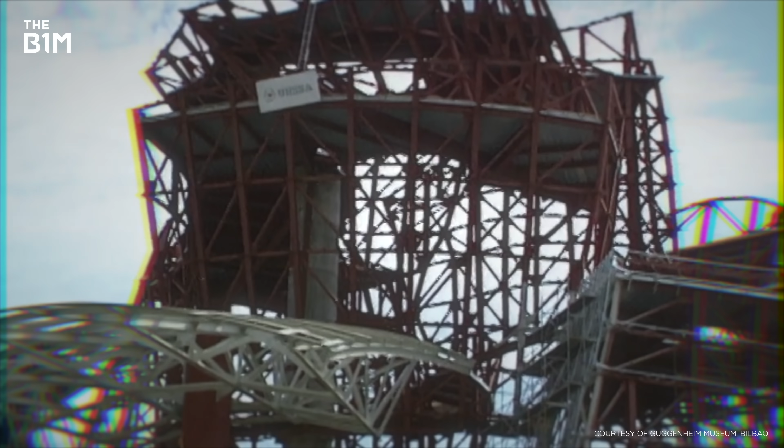People said this building couldn't be built. There were also those who said it shouldn't be built. There was a lot of skepticism that in a destitute city, devastated by the loss of industry, this was a huge gamble its citizens could kind of do without. This project was going to be a success for everybody or a failure for everybody.

Philip Johnson calls it, quote, the greatest building of our generation. But in one last throw of the dice, this building defied all the odds and in doing so, changed the world. It immediately was hailed a masterpiece when it opened in 1997.

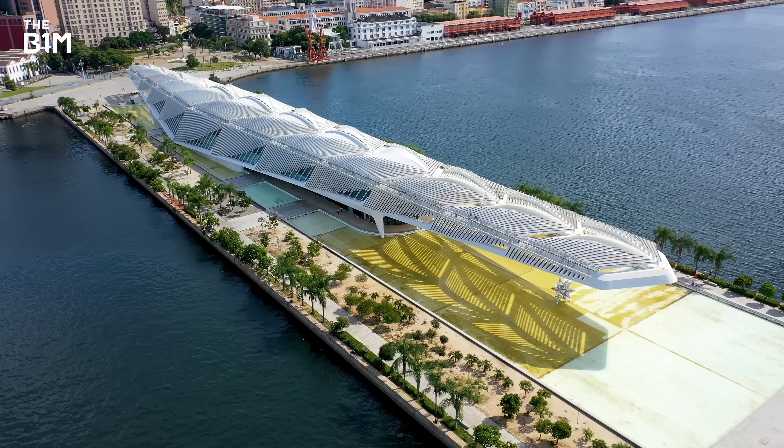Today, we're used to seeing buildings that defy the laws of physics, but back in the early 90s, when work first began on the Guggenheim Bilbao, there was nothing on Earth that looked anything like this. Considered by many to be a masterpiece. We got to maybe push things further than have ever been done going forward.

It was built using software developed to design fighter jets. It kick-started the use of 3D tech, leading to a revolution in construction. It made a global superstar its architect and transformed its host city from a downtrodden backwater into a thriving global destination. And if all that weren't enough, it was so successful it went on to become a template for urban regeneration that is still in use today.

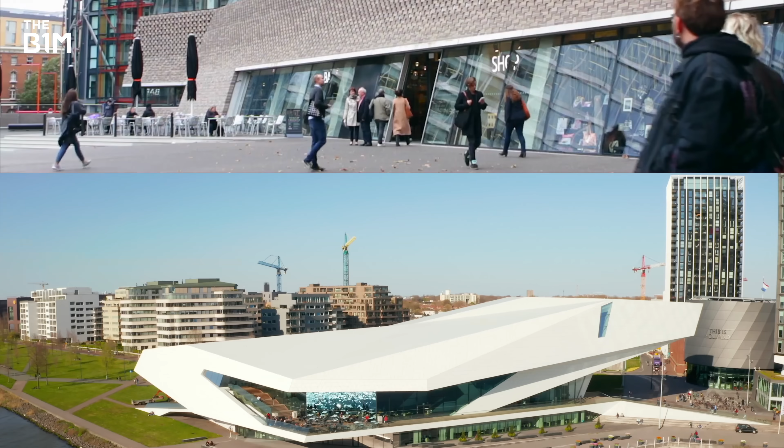In fact, you're probably living near somewhere that was inspired by this structure. How it was built is a story that involves Russian submarines, rock climbers, and a giant fish. But most remarkable of all is the fact that despite its outrageous design, it was completed on time and on budget.

Our story begins back in 1991 in northern Spain. Forget the sun, sea and sand of the south, this is the Basque Country, Spain's historic industrial heartland. It was an area of mines, factories and more than its fair share of rain. Its largest city, Bilbao, had been a prosperous hub of heavy industry, with steelworks and shipyards lining the Nervión River that ran through it. But as the world changed, its industries couldn't keep up with overseas competitors, and in the 1970s, it fell into long-term decline.

As industry collapsed, the city was gutted. Between 1979 and 1985, a quarter of all industrial jobs were lost. And 1991 is a moment where, just to give you an idea, it was just 3 years after a fairly important shipyard, which was located very right in the middle of the city, had closed.

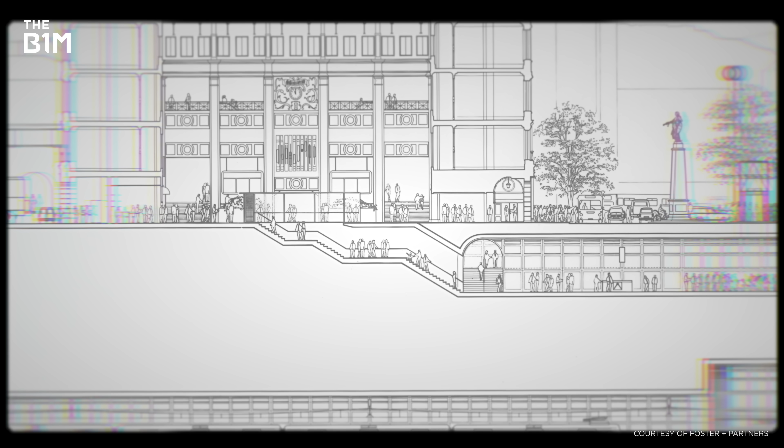Horrible. The plan was ambitious, blending practical infrastructure with landmark projects, all driven by major international architects. Foster & Partners was commissioned to design the city's first metro, while Santiago Calatrava was brought in to create a new pedestrian bridge and a modern international airport.

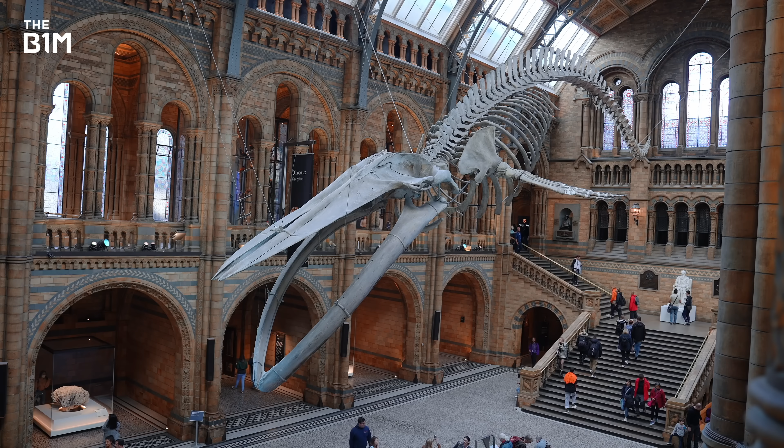But the centrepiece would have to be something truly extraordinary. A museum big enough and bold enough to stand alongside the world's greatest cultural institutions. To do this, the Basque government partnered with New York's Guggenheim Foundation. The government agreed to put up $100 million to pay for the building, as well as a one-off payment to the Guggenheim to license its name and allow access to the foundation's collection.

But with such a huge amount of taxpayers' money being spent on a speculative project when unemployment was sitting around 20%, the public reaction wasn't great. The project itself was very controversial from the beginning. There was a lot of resistance to the idea of the public institutions spending money in a cultural institution instead of the more kind of basic needs of the time.

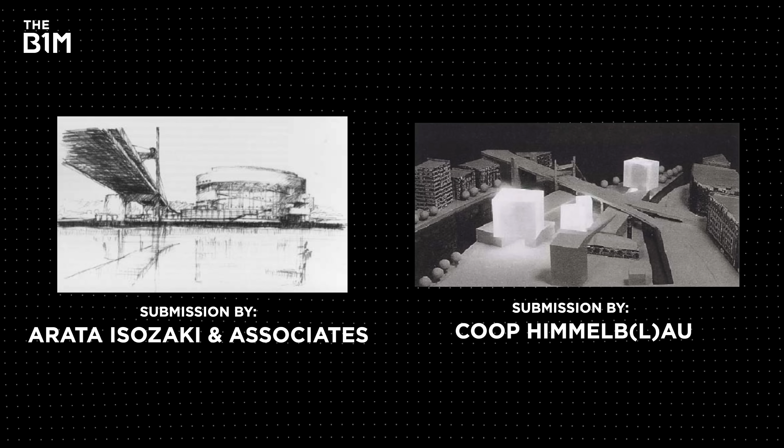A competition was held to choose a design for the museum, with participants given just 2 months to develop a proposal. To avoid any further controversy, 2 very clear stipulations were made right from the outset. Under absolutely no circumstances could this project be late or go over budget. And with those 2 things in mind, this is the design they chose.

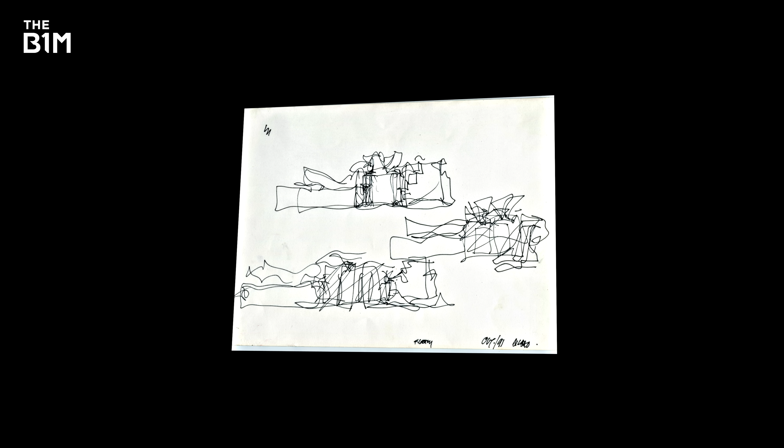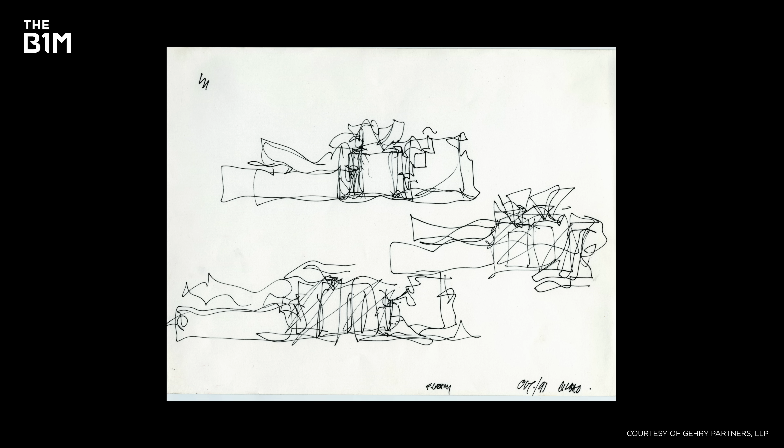The panel decided on Frank's design, which, although it was probably the one that made everybody more nervous about how you can build that, it was fairly clear that it was the one who had understood and reflected better the different goals for the building.

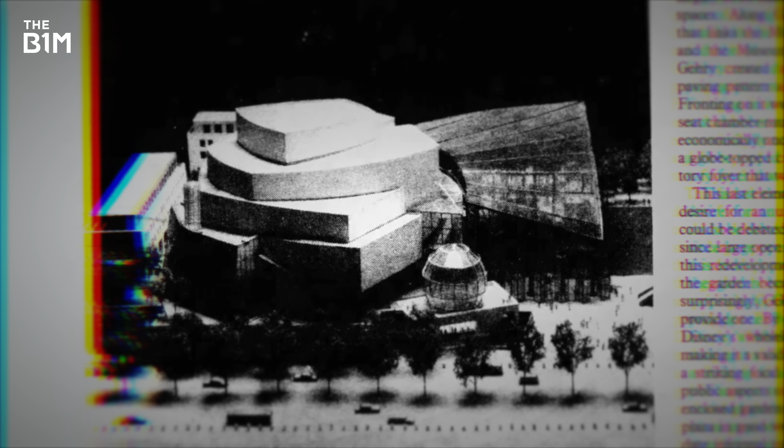The panel had reason to be nervous. Frank Gehry had built a reputation for innovative, eye-catching designs, but his latest venture, the Walt Disney Concert Hall, was making headlines for all the wrong reasons. Commissioned in 1987, by 1991 the project was entering a long hiatus as engineers struggled to work out how to build it, and funding and planning issues stopped any significant progress.

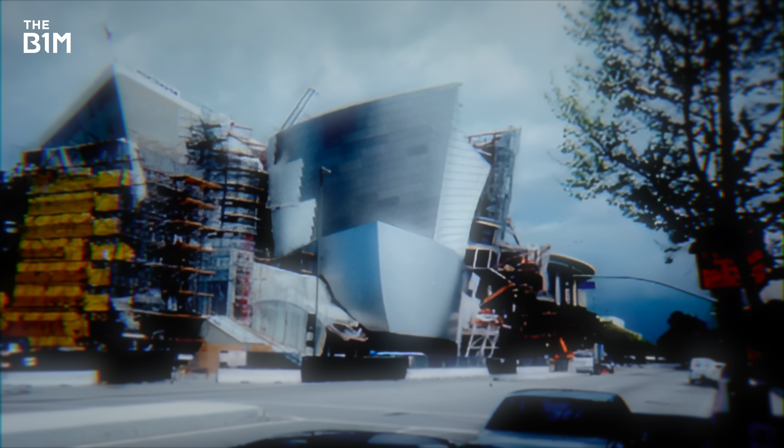With an even more audacious design for the Guggenheim Bilbao, serious questions were being asked about whether it was even possible. There was a lot of skepticism, and a lot of criticism also even from the architectural world, saying, well, this building cannot be built, or cannot be built on time, cannot be built on budget.

But this project would be different. To pull off his most daring design yet, Gehry had an ace up his sleeve. But before he could use it, his team first had to transform his early sketches into something more tangible, starting with his trademark process of model building.

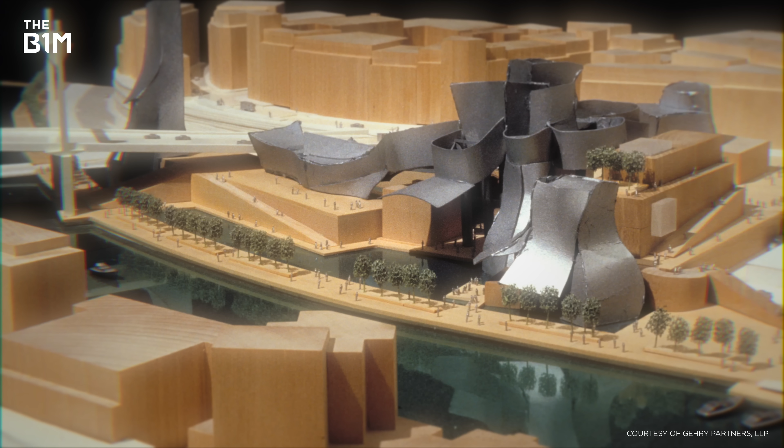Using those initial sketches as a foundation, Gehry's design team began experimenting with models made from paper and card, developing the building's distinctive form through physical manipulation. There are initial conceptual sketches, descriptive gestures of what the building is trying to capture, then physical models that are initially just like small, almost like children's building blocks.

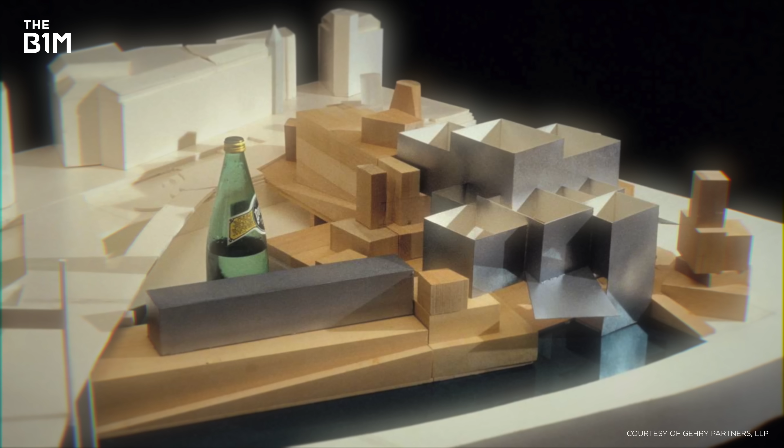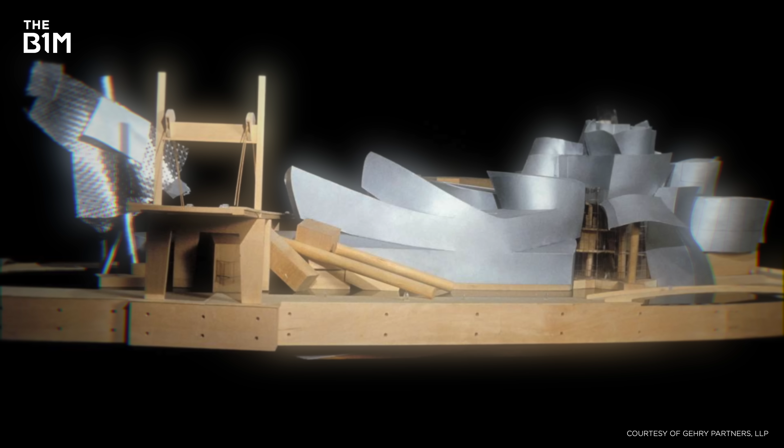From these, the team would develop hundreds of models, increasing in complexity as they balanced creative flair with the practical requirements of the building. You were working with the form both from an expressive gesture, but then also dealing with some of the work that was happening with the consultants and what their requirements were, how you were meeting floor area requirements, or did you have enough room for the bathrooms that were needed in that area?

Now, designing something this complicated with pieces of card is one thing, but building it is a heck of a lot more difficult. And to explain why, I'm going to need some crisps.

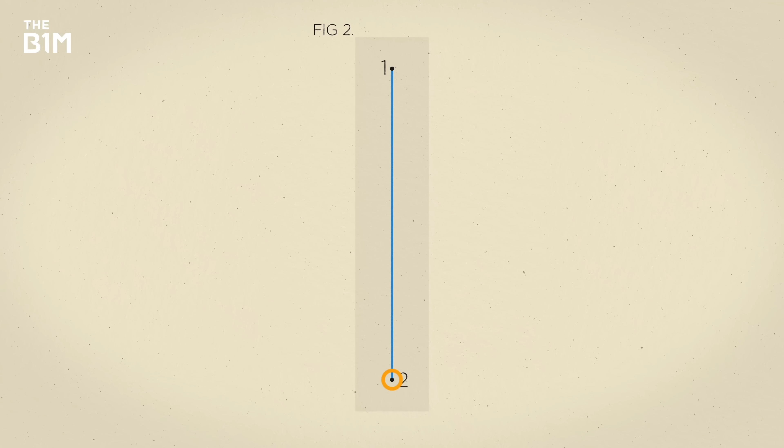For thousands of years, architecture and engineering has run on a set of rules. Buildings were based around flat shapes or planes like squares, rectangles, and triangles. Within those, certain things will always be true: two parallel lines will never meet, a straight line can always be drawn between two points, and right angles are always 90 degrees. That's known as Euclidean geometry, named after a guy called Euclid who first wrote about it. It's a big one.

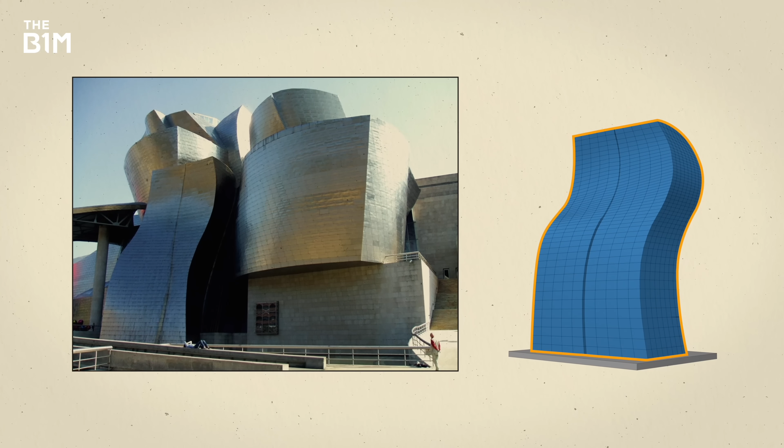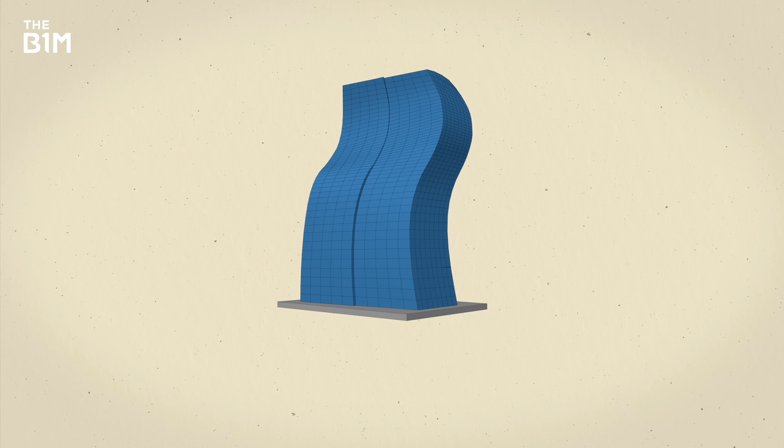You can see this in everything, from the pyramids to skyscrapers like the Empire State Building. But the Guggenheim Bilbao isn't based on flat surfaces. Just take a look at this wall here. Look how it curves out, then back in on itself, then twists around the higher it goes. If we draw a line from here to here, rather than being straight, it ends up looking like this. And if we drew a triangle on it, the angles wouldn't add up to 180 degrees. Shapes like this fall into a category known as non-Euclidean geometry.

So Euclidean, non-Euclidean, why does any of that matter? Well, this right here is a crisp, or to our American viewers, a chip. Now, this is actually a really good example of Euclidean geometry because it's round, flat, square, no surprises. If you were an engineer and I asked you to build this for me, it would be pretty straightforward.

I could draw it from this angle and from this angle, and you'd have a pretty good idea about what I was after. Now imagine I've asked you to build me a Pringle, which would be a pretty strange request. I could show you it like this, and it would look flat, but turn it this way and you realise it's curved not just in one direction, but in two. I can't accurately draw this in two dimensions because it doesn't follow any of the rules that allow me to do that. I could give you the gist of it, but that's not really good enough.

Engineers need precise measurements to be able to carry out their work. To really show you how to build this, I would need an advanced piece of software. Enter CATIA.

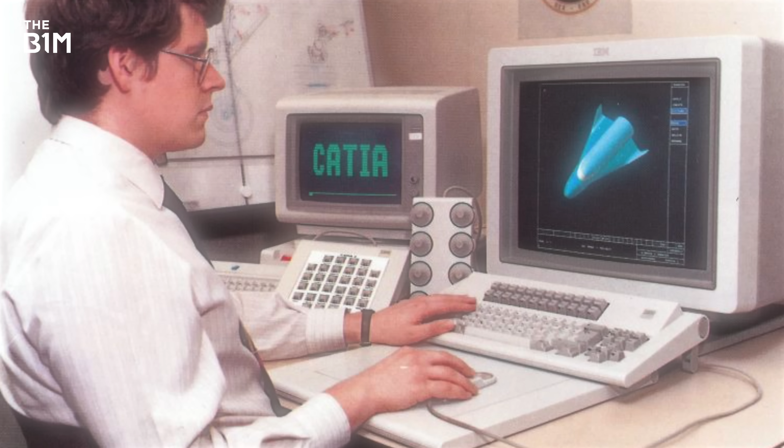CATIA is a 3D modelling software first developed to help design the French Mirage. But in the early 1990s, it was making a name for itself in the design of the new Boeing 777, touted as the world's first paperless aeroplane.

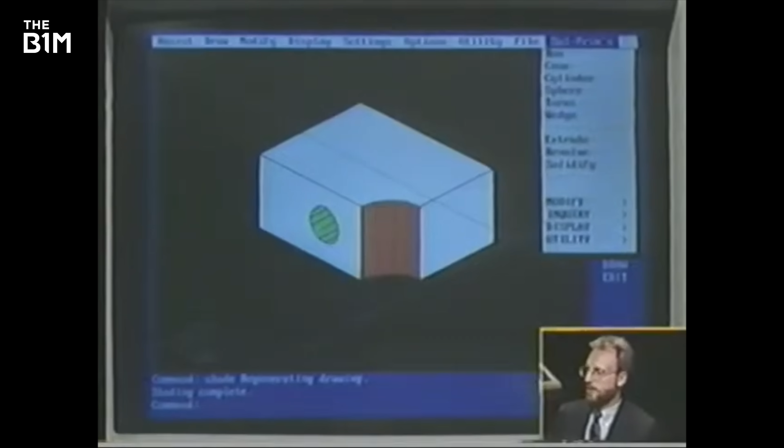Computer design packages were beginning to make inroads into architects' studios, but what CATIA offered was revolutionary. Because it was based on mathematical equations rather than polygons, it allowed the team to model complex 3D shapes and from that model provide accurate cross-sections and plans to engineers.

So at the time, the prevalent way of working was CAD, AutoCAD, Graphisoft. You could do limited stuff in 3D, but it was predominantly a replacement for 2D pin bar manual drafting, right?

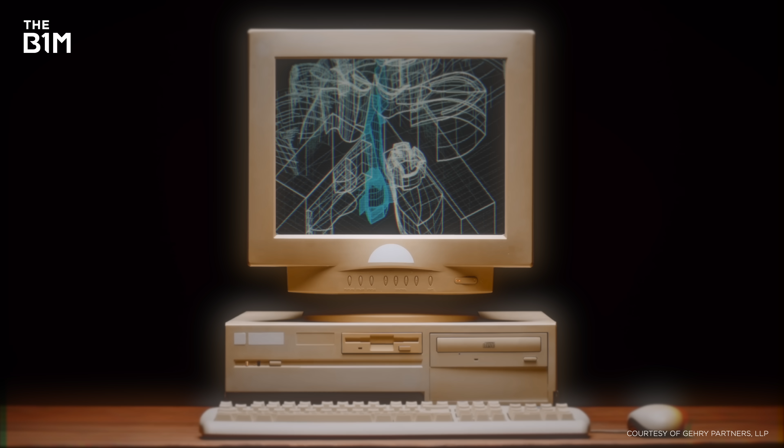The complex geometries being developed by Gehry's design team were still novel in the world of architecture, but this was all basic stuff for aerospace software which could not only model the complex geometries, but also split them up into components which had precise details about them.

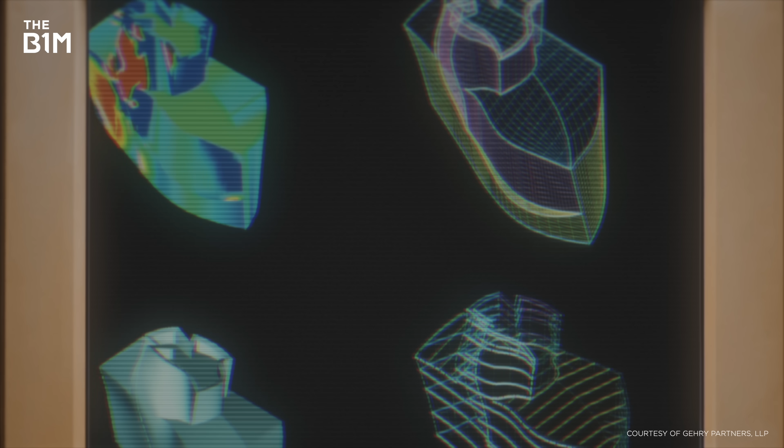The idea that there was maybe an overall shape to the airplane or car, and then pieces would be fit into that, and then those pieces would be distributed from manufacturing. The whole thing would come together virtually. You would test the plane, and then you'd build it, and it would work, right?

But the first time Gehry used the software, it was to design something more used to swimming than flying. Well, yes, that was pretty innovative at the time, and we already had some early successes using the CATIA technology through our Barcelona project, which was built in 1992.

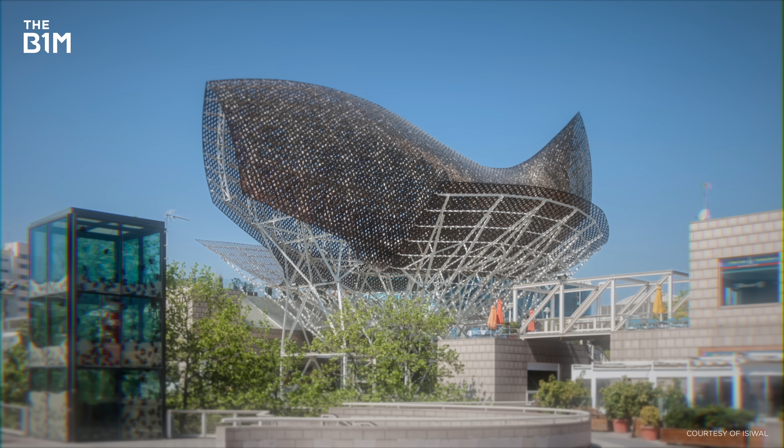Gehry had been commissioned to design a sculpture for the 1992 Barcelona Olympics. What he designed was this: El Peix, or fish. Now, granted, it doesn't look super complicated, but just like the Pringle, it's based on a series of huge curves that are almost impossible to describe on paper.

So for a solution, his team turned to CATIA. We were doing it through traditional drawings and it just wasn't working out, and we found some support outside the office that had aerospace and aeronautic background.

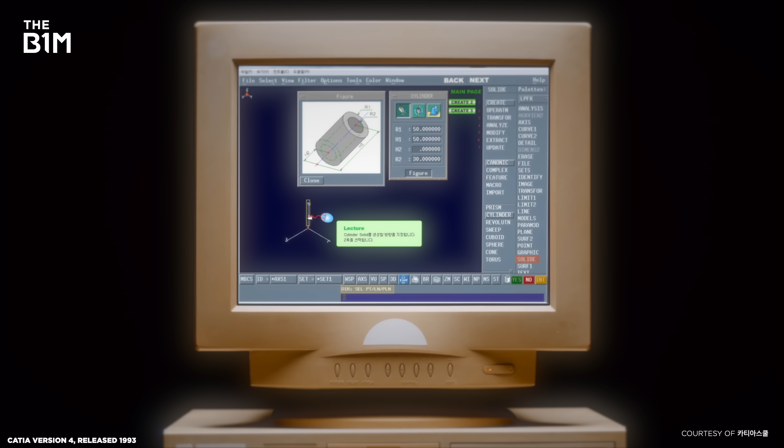This strange new software had proved its worth and was seen as the key to unlocking the daring design of the Guggenheim. Now, for any Gen Zs out there thinking, well, so what? It's worth remembering just how basic digital tech was back then.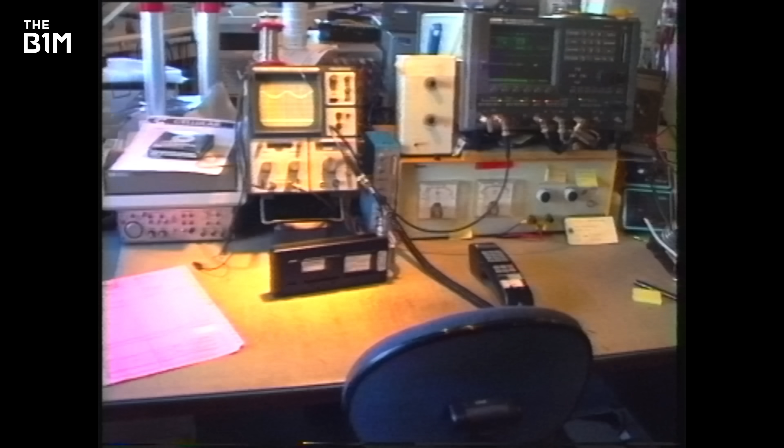At this point in the early 90s, most people had never used the internet, mini-discs were the latest way to listen to music, and cutting-edge computer game graphics looked like this.

And this sounds crazy, but the ability to do real-time rotation of shaded models, you really didn't see it anywhere before. I mean, you would work in wireframe, and then there would be this process where you'd render and you'd see over the course of a half hour that image taking place, you know.

And just to see somebody being able to look at a complex shape from all its sides and understand it was, you know, it's not just about the real time, it's interactive, right? So the interaction with real-time geometry for me was revolutionary.

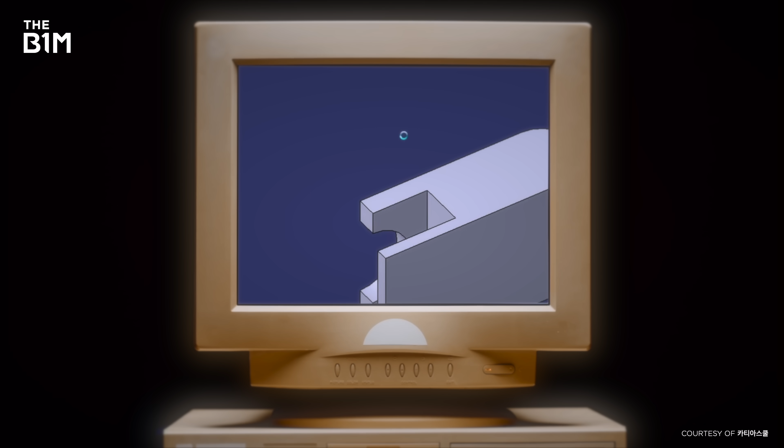Now, as groundbreaking as this technology was in the 90s, don't think the innovation stopped there, because CATIA has come a very long way since the days of Guggenheim.

Take a look at this, for example. It's called the Henderson in Hong Kong, and as you can see, it's absolutely epic. It was also built using CATIA on the 3D Experience platform and really pushed the limits of design and fabrication.

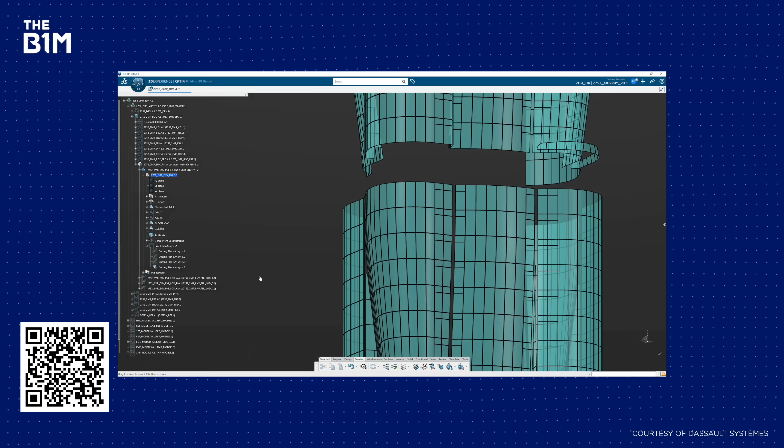The entire skyscraper is covered in more than 4,000 individually shaped panels. 3D Experience models each one and even simulates how they'll be manufactured.

Now, when I was first starting out in the industry, I honestly would have thought that something like this would have been impossible because everything is so complex and interconnected. You change one thing and everything else gets affected and has to change with it.

But 3D Experience is a real game changer because it updates everything. You make a change to the facade and it updates not just that, but also the structural layout, the internal floor plates, all of it in real time.

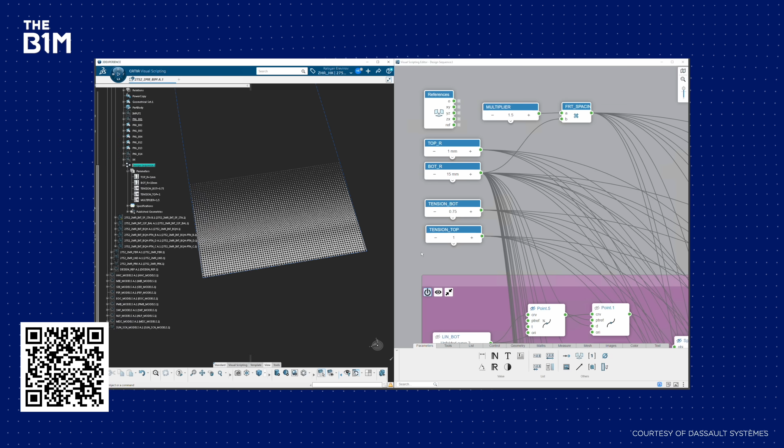And perhaps most importantly, every piece of information is managed on the same platform. Trust me, on a project this big and this complicated, with so many people involved, miscommunication happens a lot. So having one model, one common source of truth that architects, engineers, manufacturers can all refer to is a real lifesaver.

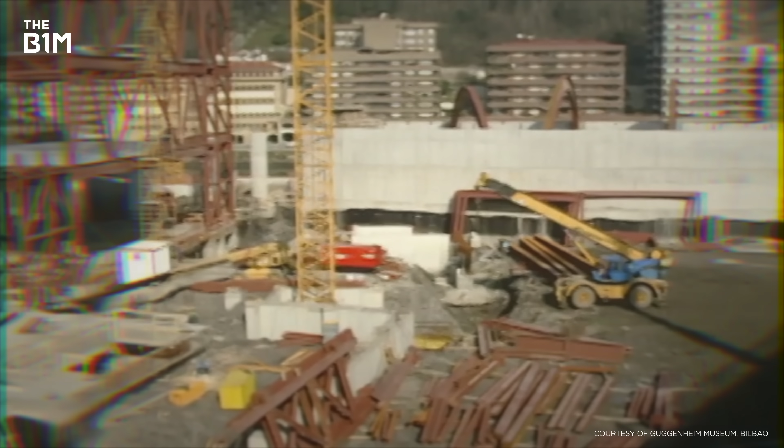In 1993, just 2 years after winning the competition, construction began. And this is where things got really tricky. CATIA played a critical role, but it didn't have all the answers. It was able to accurately describe what had to be built, but then it was over to the engineers to work out how to actually construct it.

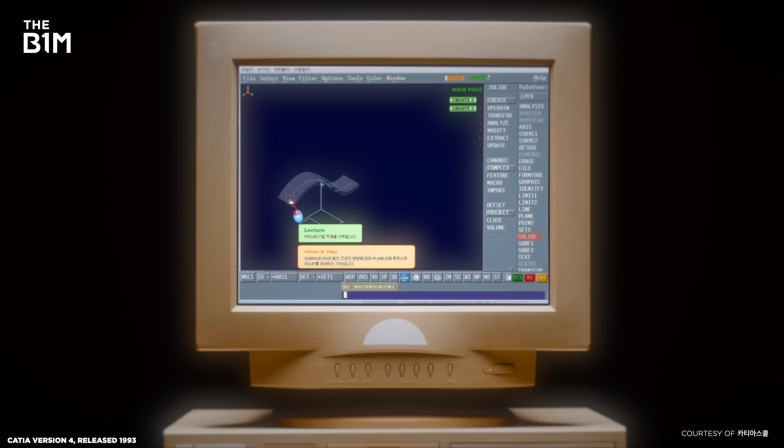What is CATIA for us? A group of surfaces and volumes. And this is perfectly designed, but nothing at all defined in one sentence. Not ready to build. While CATIA was great at defining the overall shape of the museum, a lot of work still had to go into how it would be manufactured.

You have a cut, you have a line that perfectly designed the shape of different areas. That shape is titanium, is stone, gypsum board, is glass. But in order to place these materials on the structure, you have to develop the engineering, and you have to manufacture this structure - these tubes or steel profiles in arcs of circumferences - in order to construct this, and then to put the surface, the cladding, on the titanium and gypsum or stone or whatever.

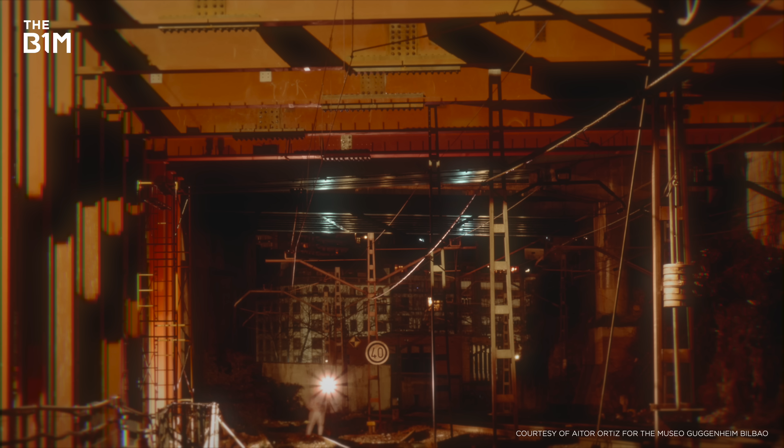The job of developing the structural design went to SOM in Chicago, who took Gehry's plans and developed an intricate steel mesh that would provide a strong frame that could accommodate the building's expressive curves, but crucially also create a large, open interior free of columns.

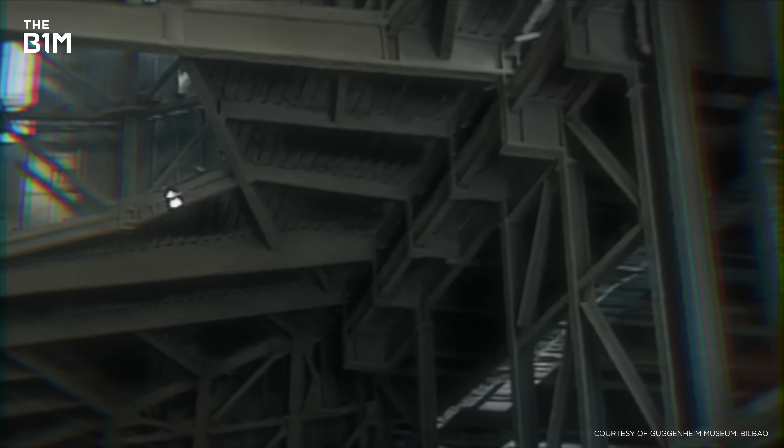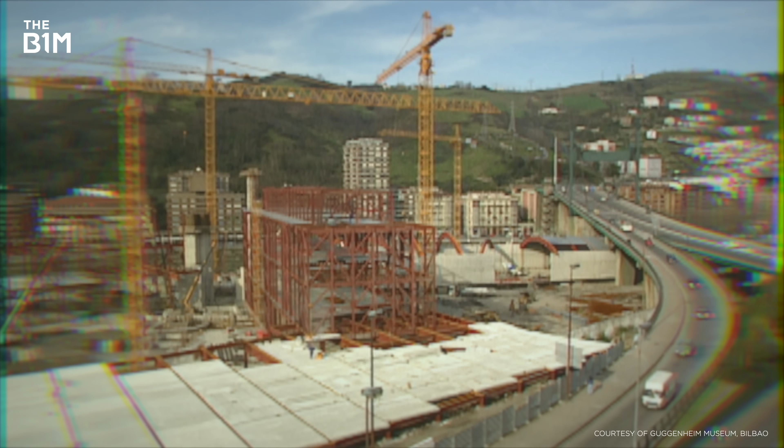The primary structure was so complex and interlinked that large parts were unable to freestand and were held in place by cranes until it was complete. The design was so intricate that no two steel beams in the entire 3,000-ton structure were the same. But also, none of them were curved.

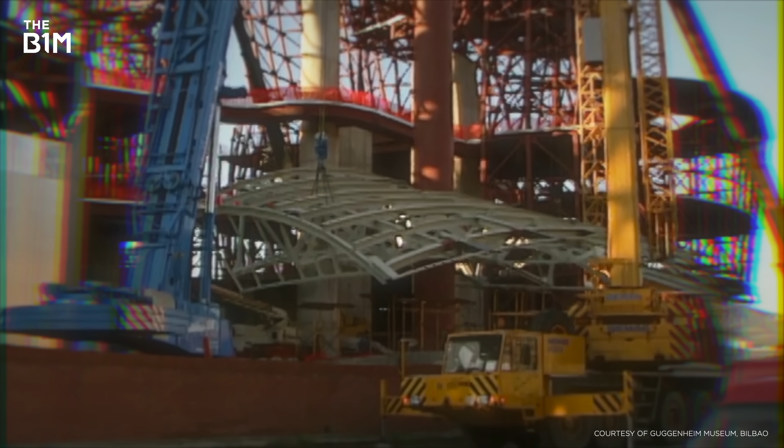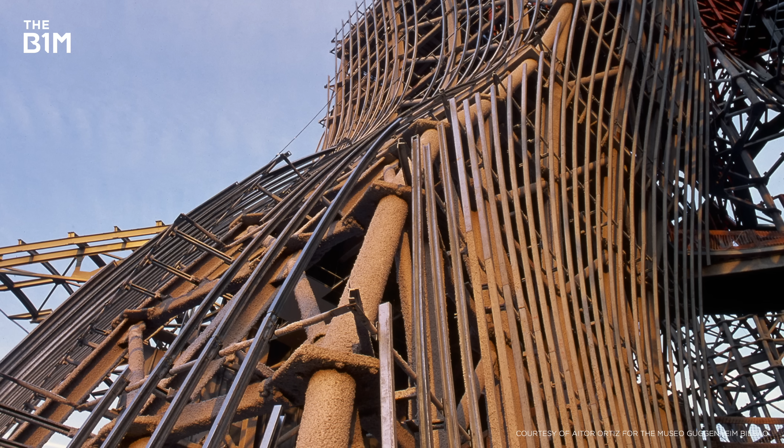To achieve the facade effect of a single or sometimes double curve, more steel structures were built on top. A secondary frame of curved horizontal beams provided shape along one axis, and a third, tertiary structure composed of curved vertical beams provided the definition for the other.

Here is the wall we looked at earlier. Look at how the different structures create arcs and curves that a curved surface can be placed on. They are arcs of circumferences in general, depending on the area or the zone. They could be straight as well, but in general, because of the shape of the museum, there are almost no straight lines - they are all curves in one direction or in two directions, depending on the area.

But all the profiles, the beams of the primary structure, were straight. The massive structure was straight, but the secondary and tertiary were curves, arcs of circumferences.

Once the structure was complete, work moved on to enclose it. Stainless steel panels were installed to enclose the structure, followed by a waterproof membrane.

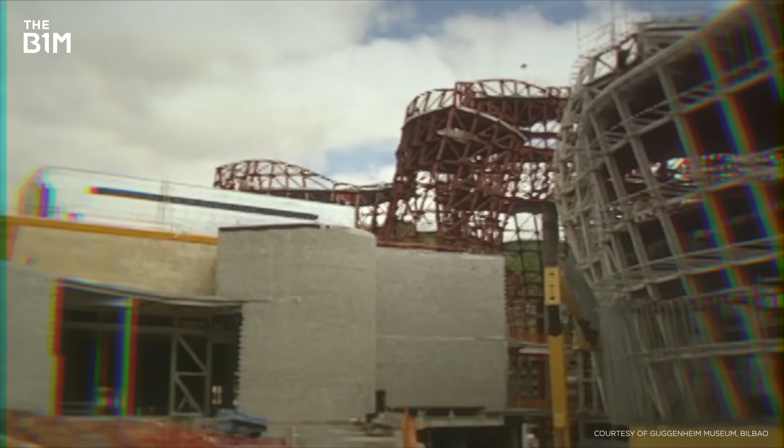The Guggenheim Bilbao isn't just about wavy curves. What really strikes you is the warmth with which it reflects the light in a soft, pillowy texture. Bilbao is a city that's often cloudy, and yet the museum still reflects this with its unique sense of warmth and sympathy. But the story of how it took on that character is a series of chance events, beginning 3,500 kilometers away.

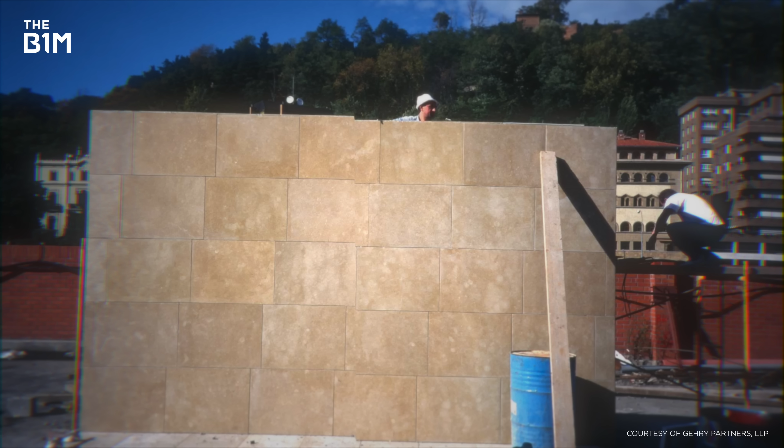The other came sometime later, on an uncharacteristically overcast day in Los Angeles. Gehry's team had been struggling to choose a material to clad the building in. He'd previously used a lead-copper alloy, but this had fallen out of favour because of its environmental impact. Gehry was unhappy with early tests using stainless steel, which didn't capture the city's distinctive light in an attractive way.

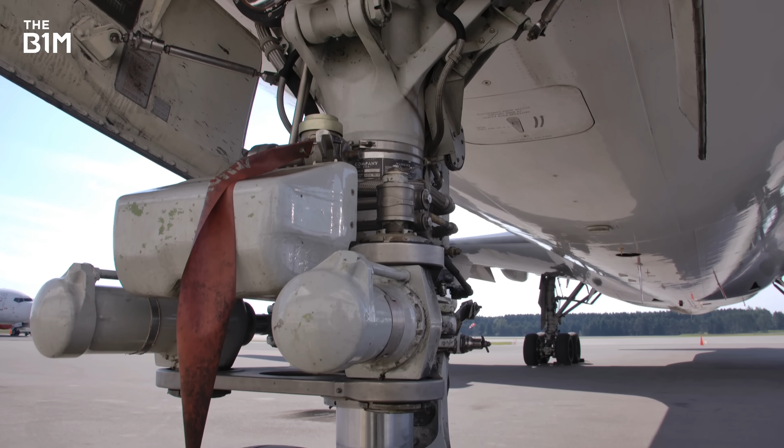On that fateful, cloudy day in LA, Gehry's eye was caught by a piece of titanium cladding on the exterior of his studio. He was impressed with how it reflected the grey sky, which perfectly matched the typical weather in Bilbao. But there was a hitch: titanium is expensive. It was more commonly used for making components for aeroplanes than for cladding buildings.

But as the Alpha-class submarines were broken down, the titanium from their hulls entered the global market, driving the price down and giving Gehry an opportunity to give the museum its distinctive finish.

It's a very thin 24-gauge metal. The thinness of the panel gives it a little bit of what we call oil canning, where it puffs a little bit, giving it a unique textural quality in how it captures the light. There's a goldenness to it that's different from stainless steel, a yellow glow to the metal.

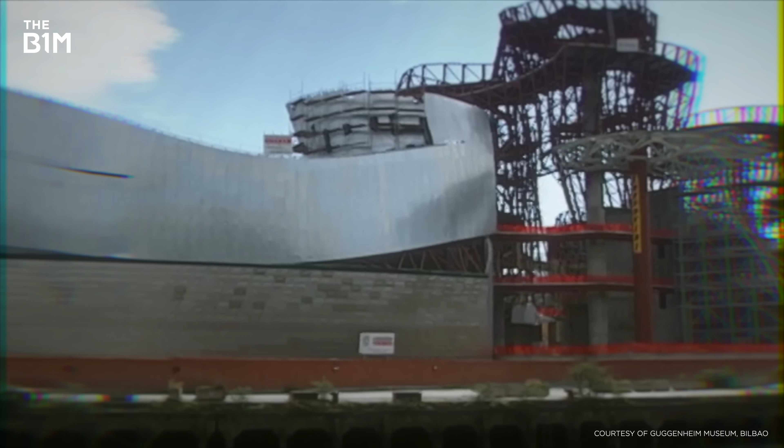33,000 panels were rolled to a thickness of just 0.38 millimeters, each measuring 80 by 115 centimeters, perfectly suited to define the final shape of the building. It was a happy accident that we chose to have a very small panel.

It naturally could bend easily over the shapes we had, which were very gentle curves. When you take the largeness of the building, it looks like a lot of curves, but when you get down to it, you can take a postage stamp, lay it over a basketball. If you get a small enough stamp, you can cover the whole basketball with stamps.

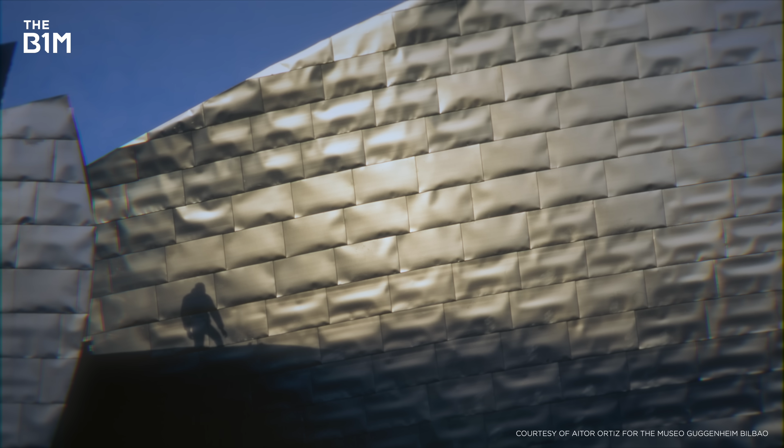While the panels may have been small enough to cover the bold, swooping curves of the facade, physically getting them into place was a whole other challenge. The solution came not from the pages of a construction handbook, but from the mountains that surrounded the city.

Rock climbers. Not only for the height, but there are areas that with cranes, platforms, scissors, you don't reach. The people must climb and then go down the surface. Now, when they have to clean the facade, they have to use climbers.

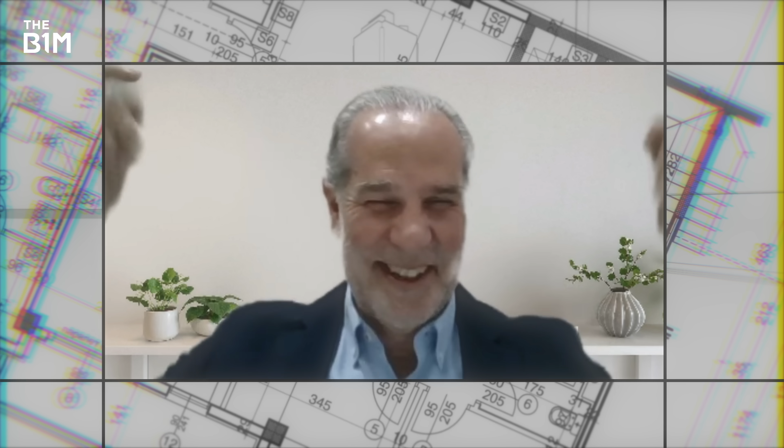As this extraordinary building rose along the banks of the Nervion, so too did the city's admiration, transforming skepticism into awe in the heart of this old steel town. I will say the first year, everybody was shocked. This is a stupid thing, this is absurd. But the point is that little by little, the building, the construction, the structure was connecting with people. Little by little, people were falling in love with the project and began to believe.

On the 18th of October 1997, 4 years after construction began, the Guggenheim Museum Bilbao opened. And as the eyes of the world fixed their gaze on this extraordinary structure, signs began to emerge that the gamble had paid off.

I remember when the museum opened that it was headline news on the CNN news program, which at that time was the only global news source. And that was a bit of a surprise for us because we thought, how is this happening? That an opening of a museum in a small city in north of Spain is becoming headline news at CNN.

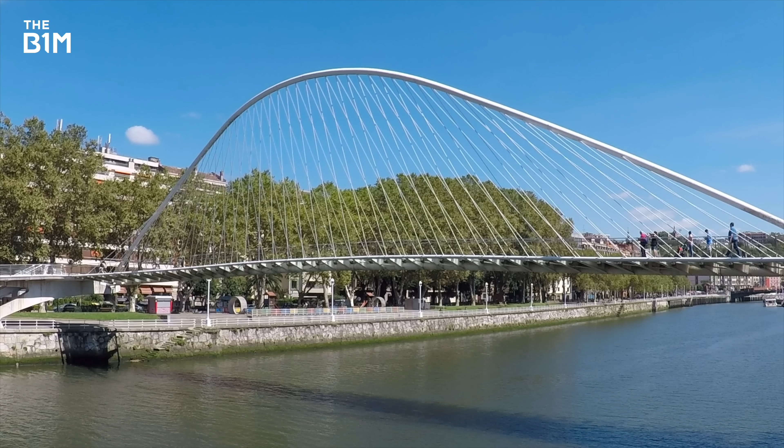As the museum thrived, so too did Bilbao. The plan to reinvent the city was bearing fruit. The metro had opened 2 years before, and the Campo Volantin footbridge followed suit shortly after, improving pedestrian access along the river on which the museum sits. In 2000, the new airport terminal opened, giving a further boost to visitors from around the world, and transforming Bilbao from a downcast regional city to a thriving global destination.

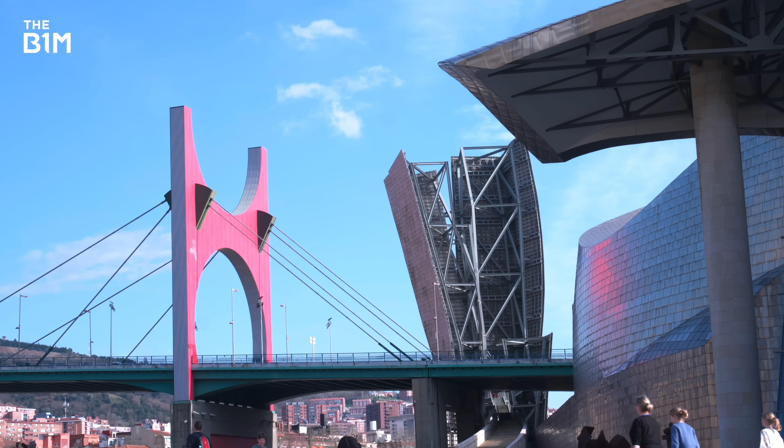Bilbao is once again a major, prosperous city. Its streets are teeming with locals and visitors enjoying everything this place has to offer. Last year, for example, it's estimated there was over 800 million euros of additional economic activity because of the operation of the museum.

What I feel when I go back to Bilbao and I see a great success, when I see the change of the city, when I see the 1 million people going to visit Guggenheim, the vitality, the lively restaurants, people, tourists, the change has been huge.

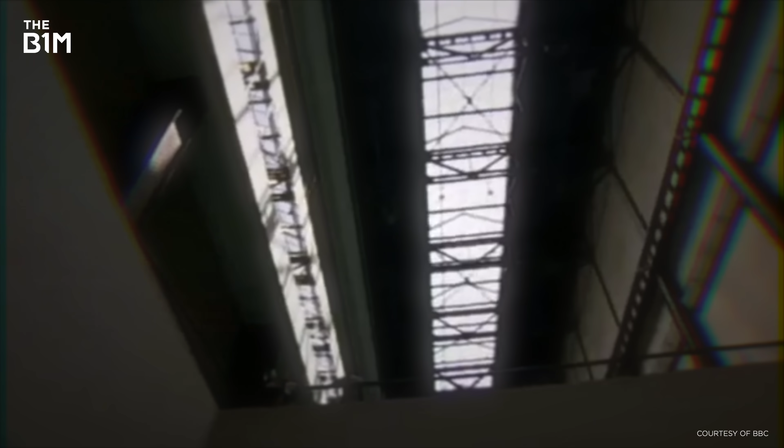The Guggenheim was such a wild success that it kick-started a wave of museum construction around the world. In 2000, the Tate Modern opened, revitalising London's decrepit South Bank.

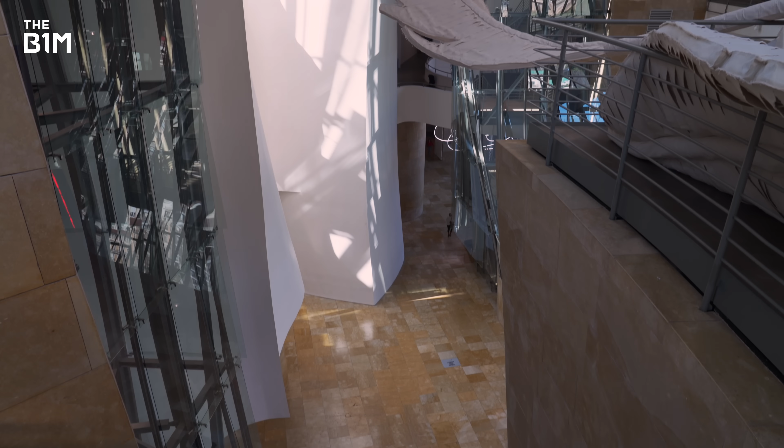And in 2010, a new Pompidou Centre transformed the French city of Metz. But the list really is endless. In fact, the chances are there's probably somewhere near you which has tried to follow the template of using a major art or cultural centre to transform the fortunes of a town or city. Its impacts even shaped the construction industry, kicking off a revolution in design and technology that still defines it today.

The role of technology and information was the kind of silver bullet that allowed these very ambitious designers to do unprecedented buildings and to have the confidence that they could take that authority and that risk.

Gehry's outlandish design didn't just pioneer the use of digital software in architecture, it fundamentally changed the relationship between the architect and the engineer. Architects are supposed to not get involved in affecting how things are built. They're just supposed to say, when they're built, this is what they look like. But with these new geometries, these new methodologies, that line between what is intent and what is the means of delivering it starts eroding.

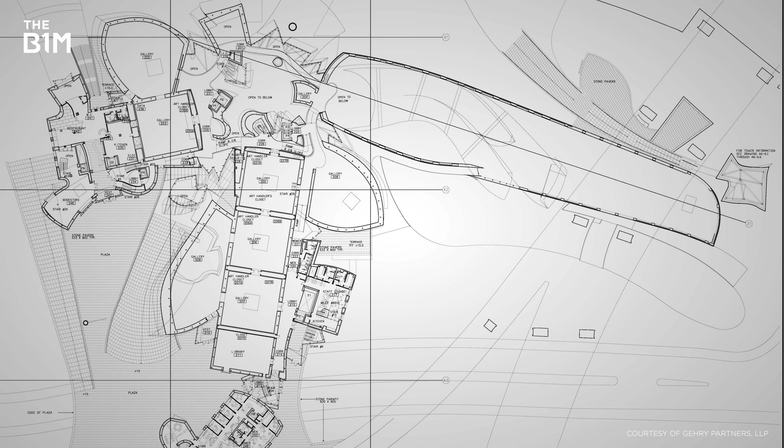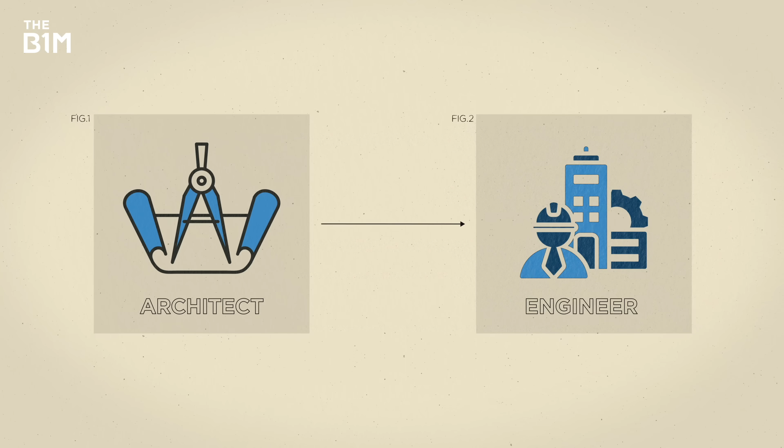The complexity of the design puts a much heavier emphasis on the role of the architect's model. In a more traditional workflow, an architect develops a series of plans, an engineer then takes those and creates their own set of drawings, and then finally it all gets passed on down to the contractors and so on.

But the complexity of these non-Euclidean designs places more emphasis on the importance of the architect's model, which in turn adds more responsibility to the architect to make sure that coordination between all the different disciplines happens as effectively and clearly as possible. So the idea that the architect's model would become the basis that everybody does their work off of was revolutionary and also, frankly, risky.

Because you can imagine a curved shape like Bilbao. If I say, well, the surface is here and your structure is going to be here, you're setting off a chain of decisions that if there's an issue, everybody can just point back to that original shape and say, well, that must have been the source of the problem.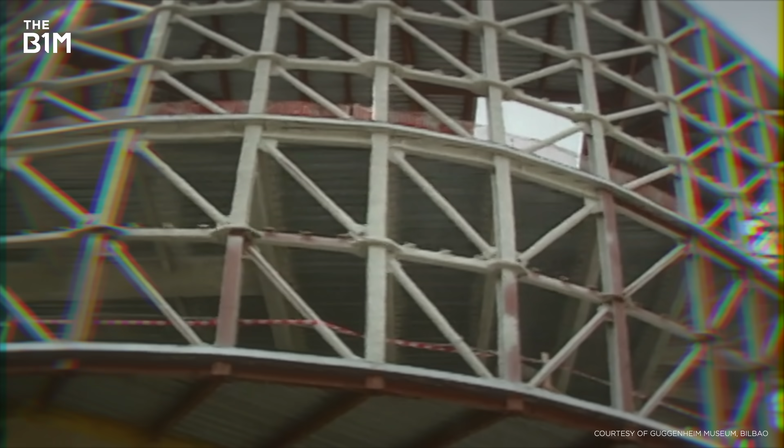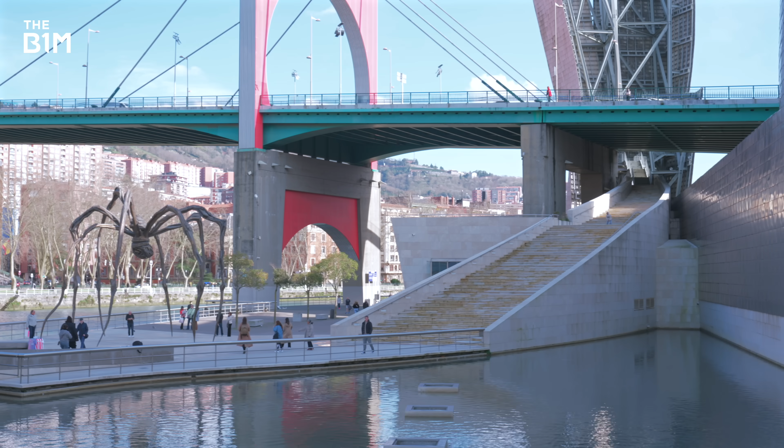It may have been risky, but for Gehry, it worked. Along with his highly collaborative approach, this greater level of involvement is what helped this extraordinary building complete on time and on budget. In 2002, Gehry Technologies was established, a service firm which was hugely influential in the widespread adoption of 3D modelling and BIM software throughout the architectural profession.

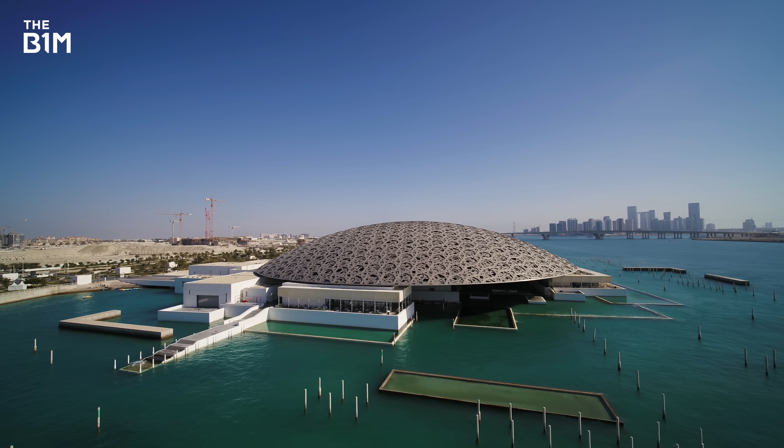It would go on to enable countless iconic buildings like the Bird's Nest Stadium in Beijing and the Louvre Abu Dhabi. For Gehry's practice, meanwhile, his reputation as an architectural heavyweight was confirmed, and it provided an opportunity to correct the record of a building that had once threatened to tarnish his legacy.

The Walt Disney Concert Hall in Los Angeles had been delayed or stopped for 10 years, and they were unable to push the project. I remember that Gehry sent to Bilbao one of the contractors, the main contractor of the Walt Disney Concert Hall, to talk with us to see what we had, what we were doing in order to be able to construct, in order to be able to keep to the budget.

After Bilbao, when Disney got resurrected, Frank said, we will only do this if we are the architect of record, and we will only do this if this process is adopted. The Walt Disney Concert Hall opened in 2003, 16 years after it was commissioned. It was widely hailed as a masterpiece and remains an iconic landmark in Los Angeles.

Meanwhile, back in Bilbao, the Guggenheim still stands as an iconic destination in the city. It's a timeless structure that still amazes visitors to this day. Bilbao.